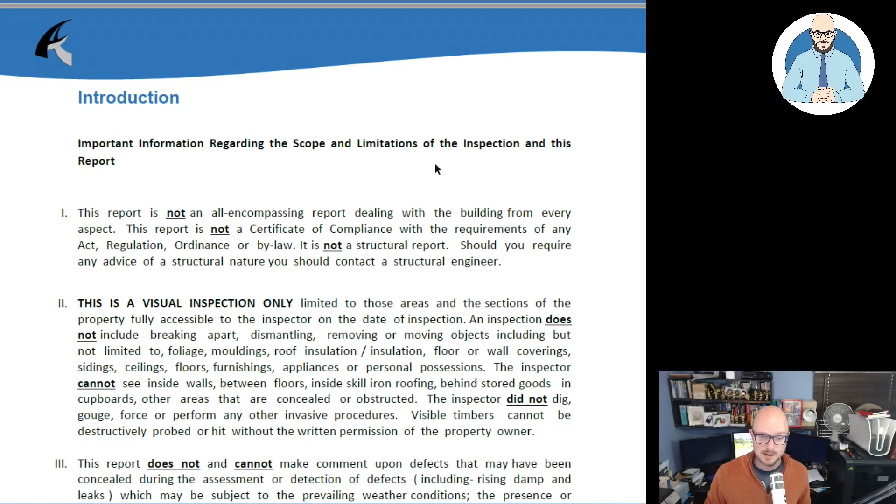Important information regarding the scope and limitations of the inspection and this report. Point 1: this report is not an all-encompassing report dealing with the building from every aspect. This report is not a certificate of compliance with the requirements of any act, regulation, ordinance, or bylaw. It is not a structural report. Should you require any advice of a structural nature, you should contact a structural engineer.

Now remember that we're getting everyone telling us, from the Building Designers Organization, the RIA, engineers, everyone saying that they're pushing for a solution for this, which would be yearly inspections. So I guess they'd push for yearly structural inspections, because these type of dilapidation inspections, you'll see what they can capture and what they can't capture without opening up the building and causing damage.

Point 2: this is a visual inspection only, limited to those areas and sections of the property fully accessible to the inspector on the date of inspection. Notice that, fully accessible, so they can just lock off bits and not let people get in there. An inspection does not include breaking apart, dismantling, removing, or moving objects, including but not limited to foliage, mouldings, roof insulation, floor or wall coverings, sidings, ceilings, floor, furnishings, appliances, or personal possessions. The inspector cannot see inside walls.

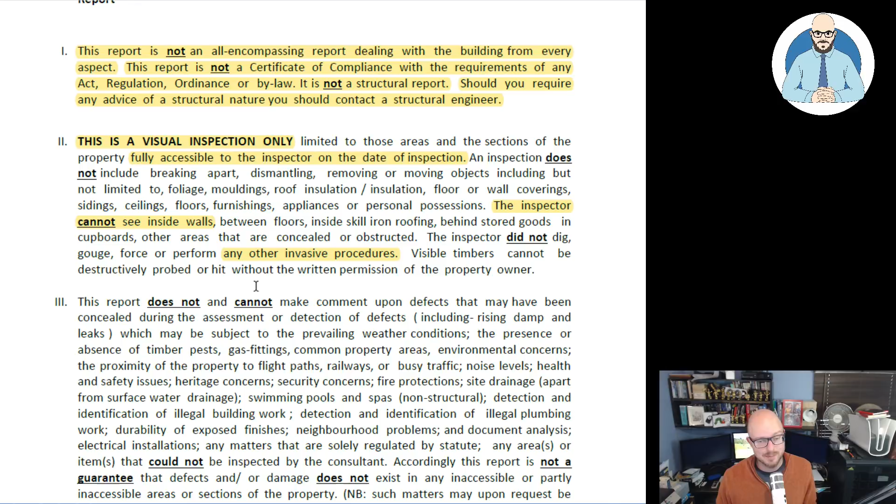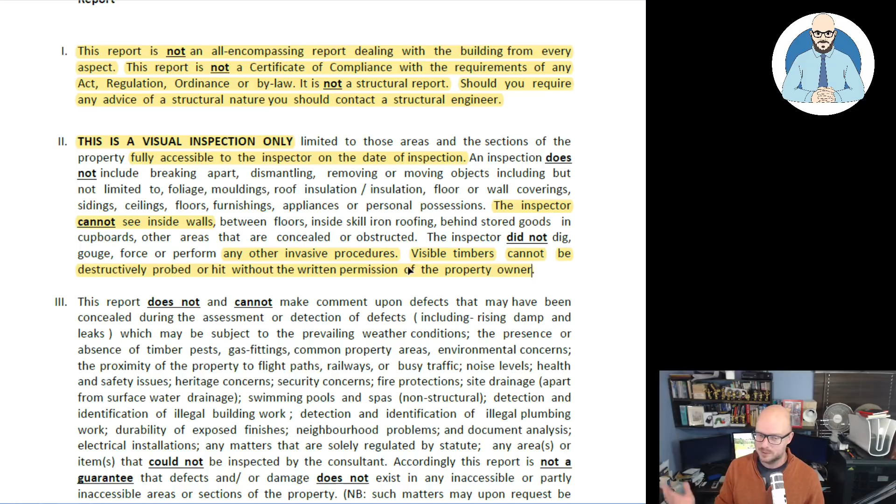Okay, you can do that, but then you have to pay for the rectification if you want. Visible timber cannot be destructively probed or hit without the written permission of the property owner. This is interesting because when we had a building pest inspection done on my mother's unit, he actually probed things without written permission and caused damage to the property. We were taking it all off and fixing it. Unfortunately, we'd already bought it, but I wasn't too impressed.

So this report does not and cannot make comments upon defects that may have been concealed during the assessment, or detection of defects including rising damp and leaks, which may be subject to prevailing weather conditions, the presence or absence of timber pests, gas fittings, common property areas, environmental concerns, proximity to flight paths, railway or busy traffic, noise levels, health and safety issues, heritage concerns, security concerns, fire protections, site drainage apart from surface water drainage, swimming pools and spas, non-structural items, and detection and identification of illegal building work. Yeah, that's another thing.

Detection and identification of illegal plumbing work. We noticed that on some jobs too, where you get a plumber out to inspect it and they go, yeah, this can't happen.

Durability of exposed finishes, neighborhood problems, document analysis, electrical installation, any matters solely regulated by statute, any areas or items that could not be inspected by the consultant. Accordingly, this report is not a guarantee that defects and or damage does not exist in any inaccessible or partly inaccessible areas or sections of the property.

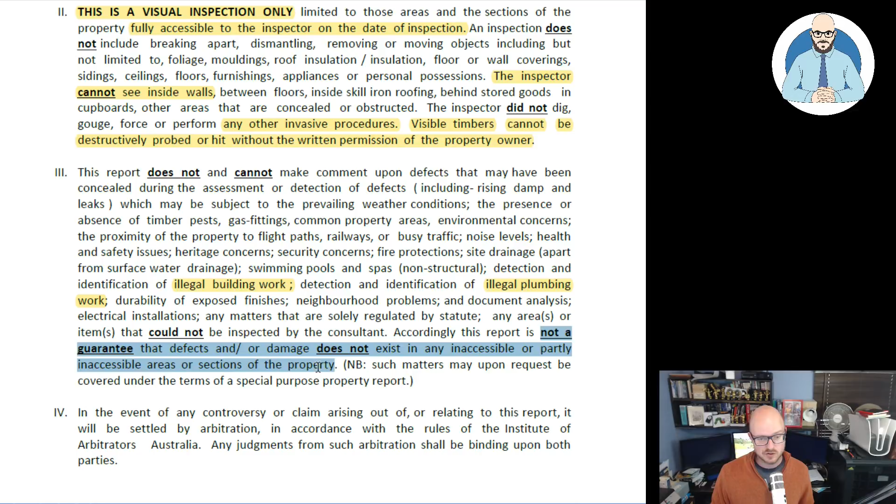I know this isn't the most exciting thing, but remember, people are calling for putting this financial burden on all the stratas or body corporates on a yearly basis as a way of addressing all these issues.

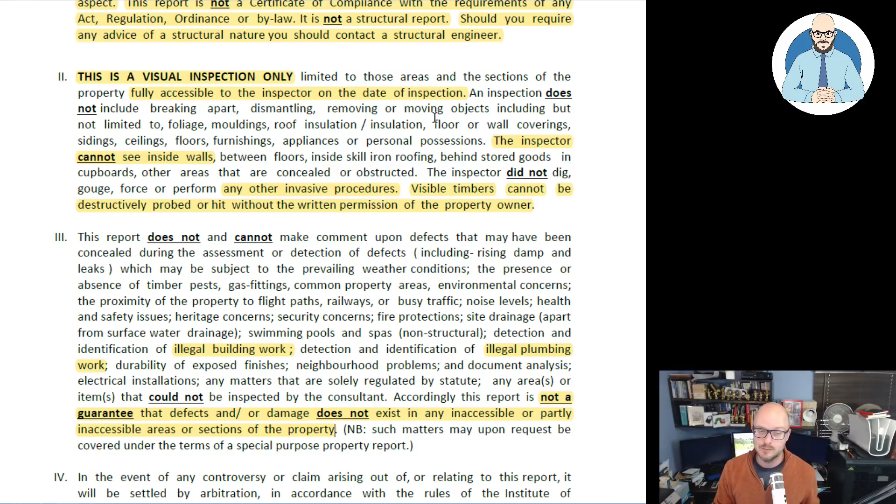But look at the limitations here, guys. It shows to me that even if you get a structural engineer out there, are they going to be x-raying the slabs to check for things? There's a lot of limitations with what you can check unless you want to be invasive, and that adds additional cost. And it's even worse if your invasive acts don't find any damage.

Such matters may upon request be covered under the terms of a special purpose property report. In the event of any controversy or claim arising out of or relating to this report, it will be settled by arbitration in accordance with the rules of the Institute of Arbitrators Australia. Any judgment from such arbitration shall be binding upon both parties. So they're protecting themselves there.

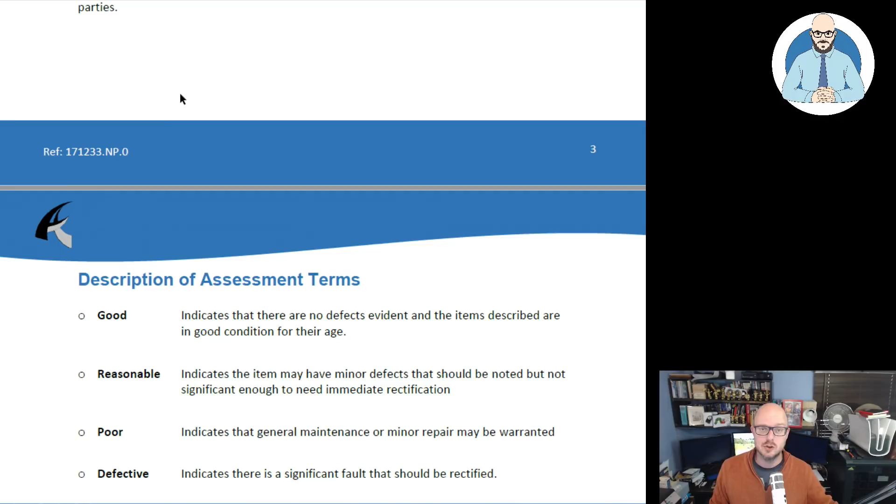I don't blame them in the slightest, because there's a lot of risk associated with this. I mean, how many YouTubers are reading these reports and talking about them?

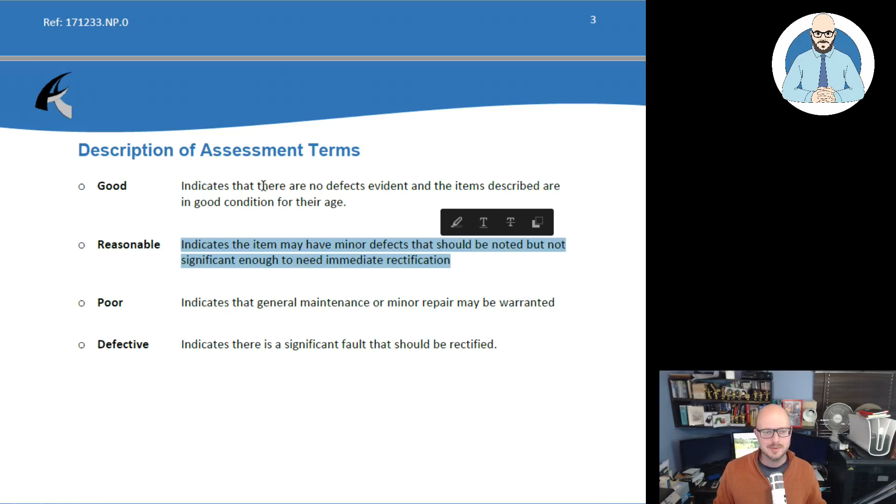Reasonable, that's our favourite Reserve Bank governor's word, isn't it, for our economy? It indicates that the item may have minor defects and should be noted but not significant enough to need immediate rectification. Well, actually, if we take these terms and apply them to our economy, it's definitely not good, and it's definitely not reasonable as much as he's saying, because they have taken immediate rectification, haven't they? Poor indicates that general maintenance or minor repair may be warranted.

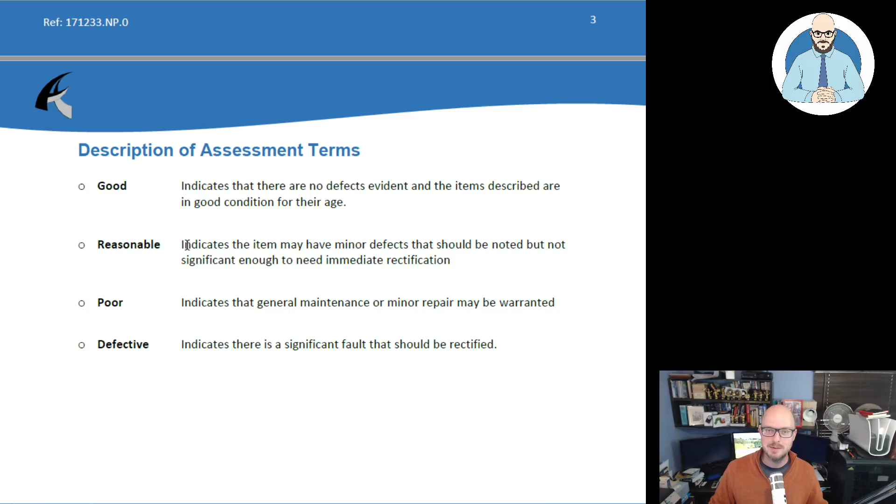What do you reckon? Do you think dropping the interest rate is poor? I know I'm going off topic, but it's funny. Maybe our economy is in a poor state by this assessment. Maybe we should get engineers running our economy. All the engineers, thumbs up if you like that idea.

Defective indicates there's a significant fault that should be rectified. Well, I think we'd all agree that that's an important thing.

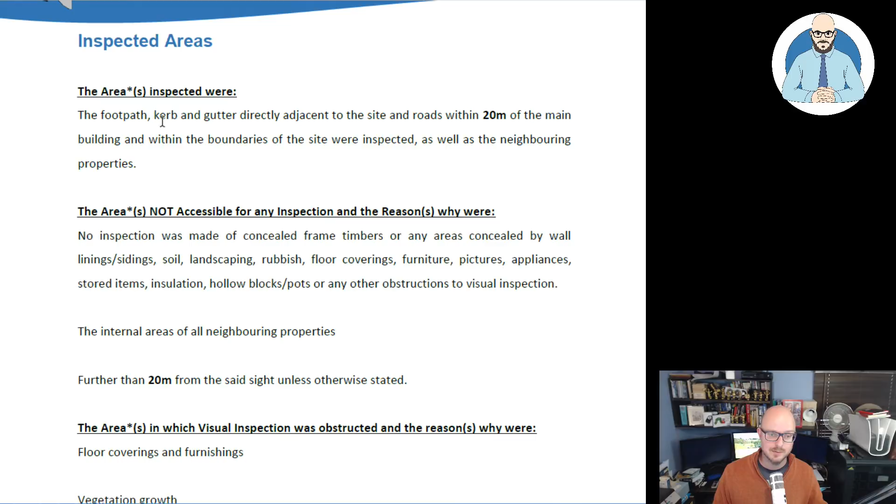So what do they do? The inspection areas that were inspected: the footpath, kerb, gutter directly adjacent to the site, within 20 metres of the main building, within the boundaries of the site were inspected, as well as neighbouring properties. The area is not accessible for any inspection, or any areas concealed by wall. Yep, we've talked about that.

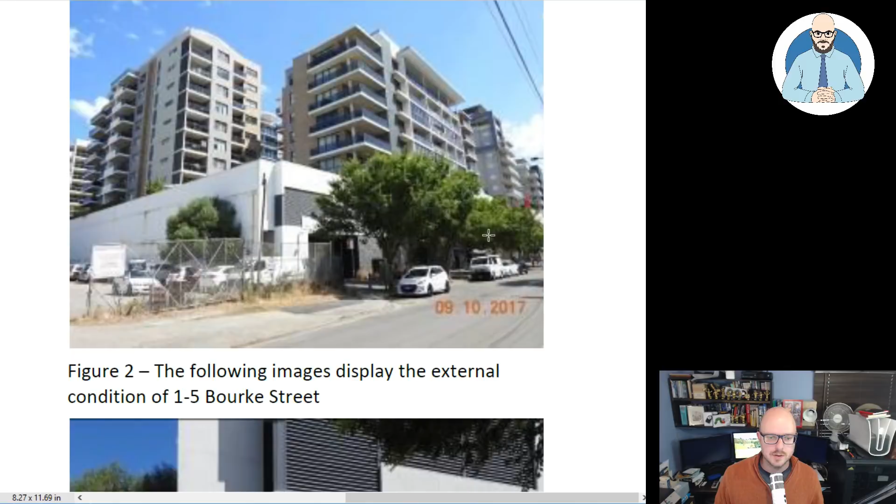So let's have a look. And here we go, this is the inspection. This is how they do it. You can see here, figure 2, the following images display the condition of 1-5. Here's an overall image, and they date stamp each photograph because this can be used in court proceedings, can't it? And this is the general condition of the northern facade.

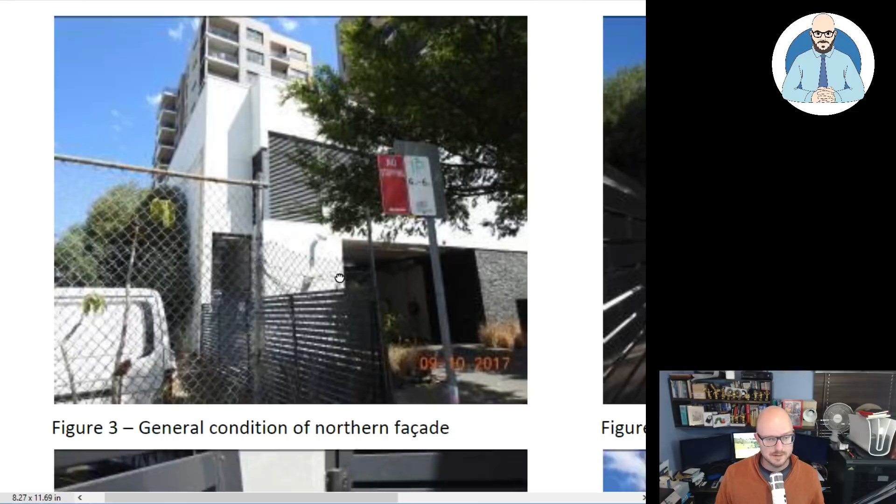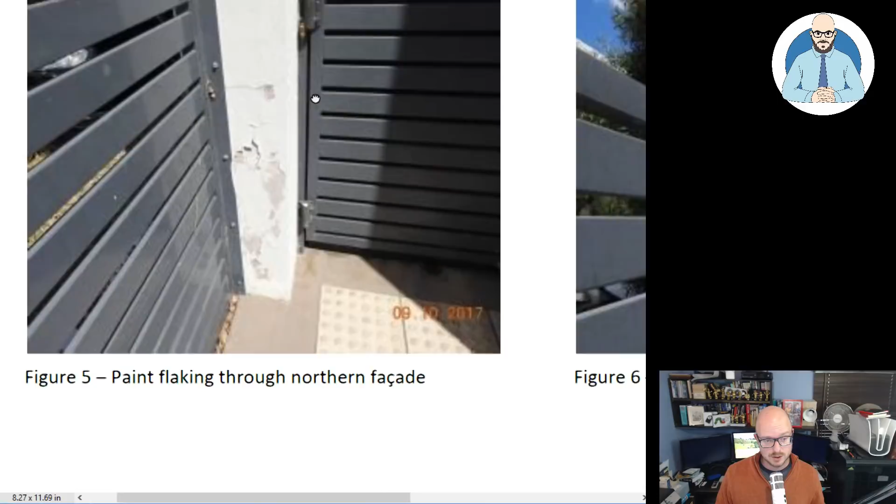I hope they have higher quality images than this. This will be a huge document, honestly. If they did it in Word, it may have dumbed it down. So you can see here there's some damage, the general condition, paint flaking through the northern facade. There's some damage here, cracking propagating through the northern facade.

Where is that? Is that there? Maybe? Yeah, these images aren't as clear as you'd hope, are they? So we've got, just fit that to window. Paint flaking through the northern facade. Some cracking here, cracking through the facade, cracking through the northern facade.

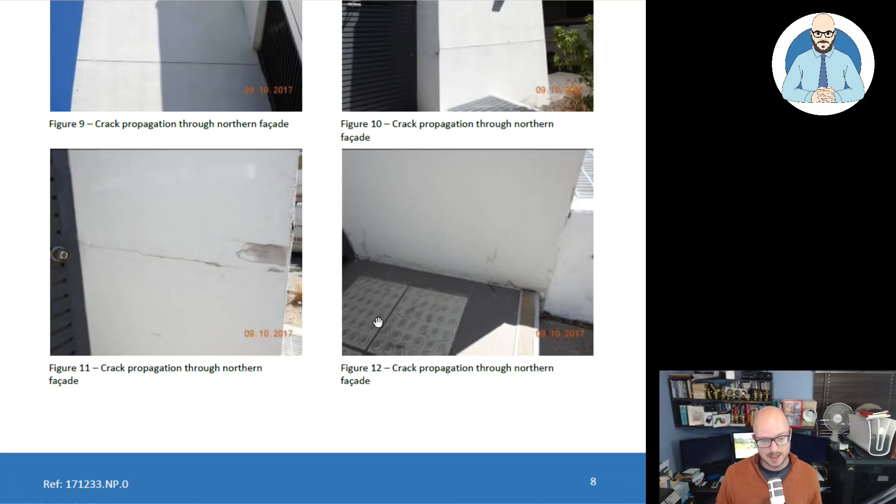Cracking, and look at that damage. Something's hit that there. Cracking propagation through the northern facade. Here, cracking. So they have to go through and capture as much as they can.

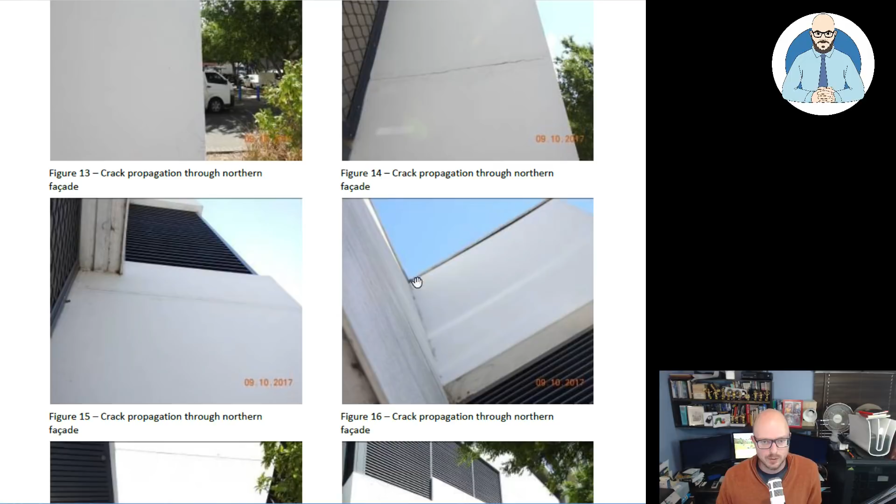To protect their client who's doing this work next door, because you don't want their work to be causing damage to this building. So remember, this should have been done before any work even started.

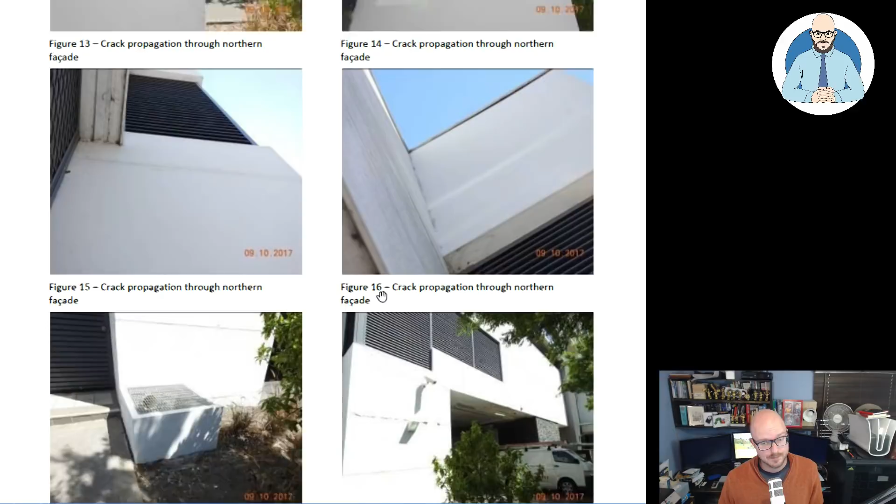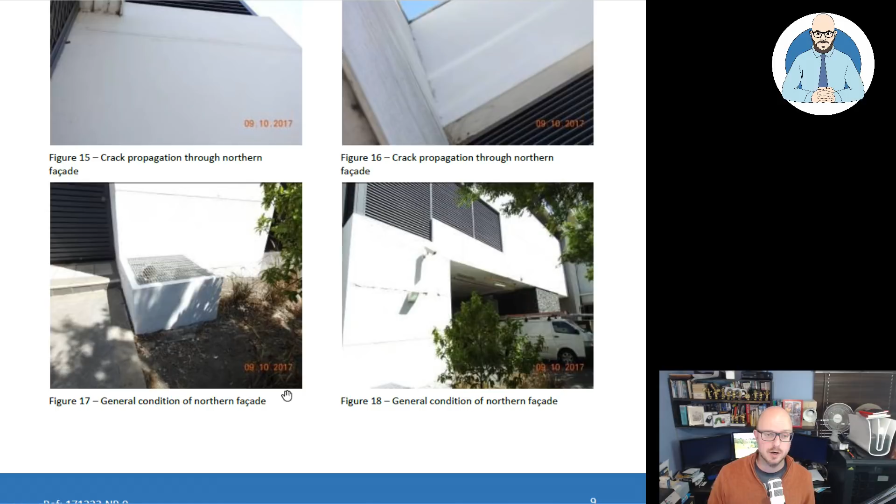2017. Got some cracking here. This kind of aligns with what we've seen in other places, where people were leaving comments on reviews of Mascot Towers that they had advised of cracking from 2011. 7 News reported on it as well, that people were informed of that.

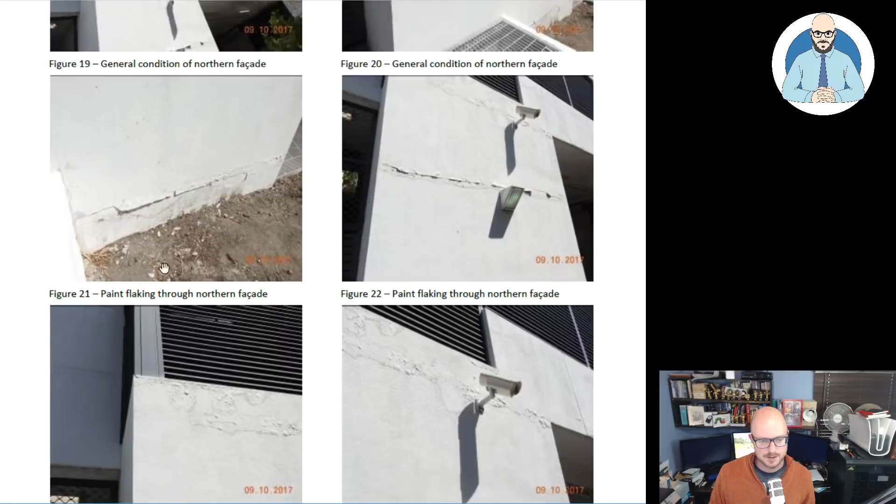Look, you've got cracking here, general condition. Look at that cracking. Is that the same one? It's the same photo, the same spot here. Paint flakes through the northern facade. So these are all signs of damage, of water getting into it, potentially expanding. So here we go, you've got paint flaking, you've got some damage there.

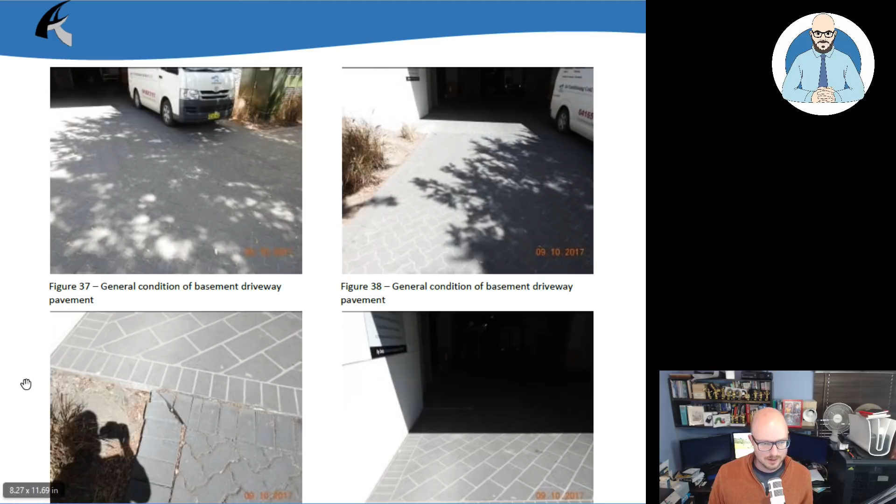But one image that I want you all to remember, and we'll get there. I mean, they're looking at the general conditions of the pavement and driveway. There'll be a lot of stuff here that's just for the record, little stuff like that. They've got to pick it all up, you've got to photograph all of it. So this is a full day's work. I don't know if he's wearing a hat - he should be, because it looks sunny there. It's a health and safety issue.

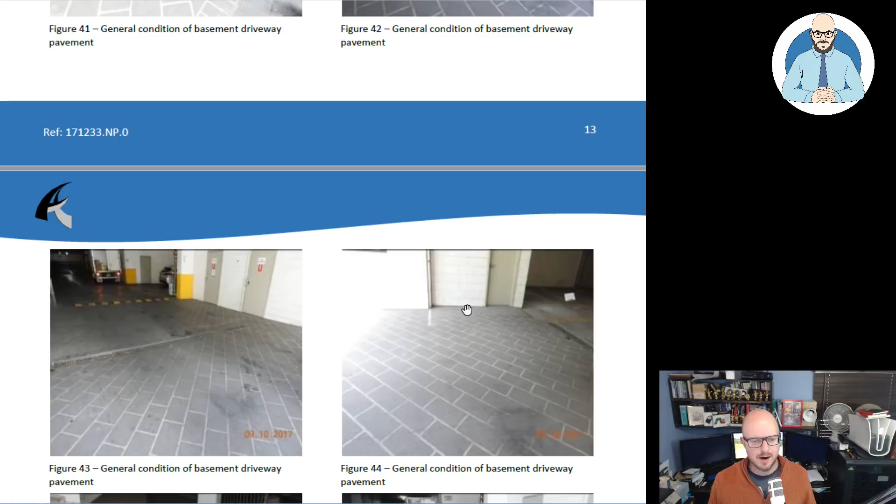You can see here, there's some cracking there. There's always going to be minor things like this, minor stuff, but they need to record it all. We've had jobs where, based on the photographs we took, we used that to get a builder to replace some damaged tiles that was damaged from their guys moving stuff around. That's what you do - you do it to protect your client.

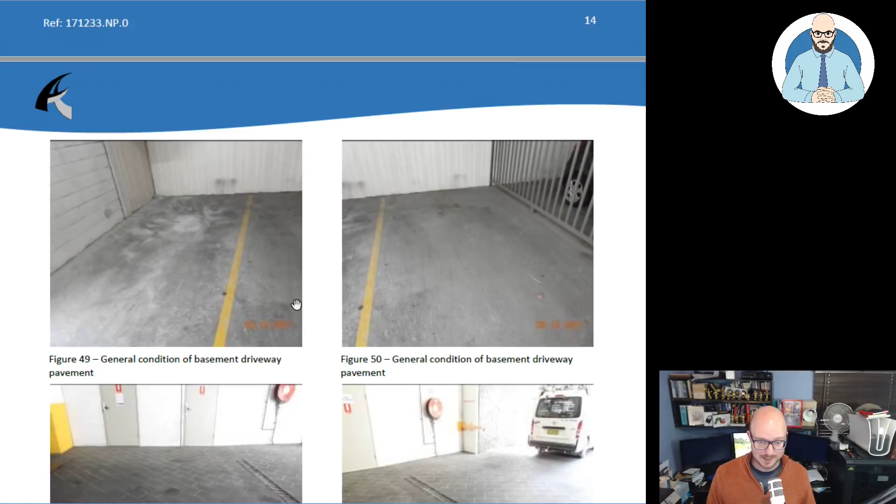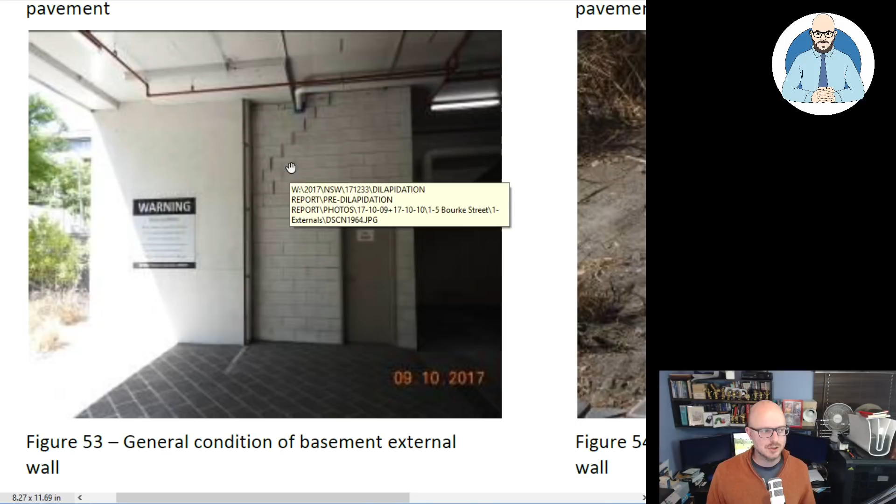Now, don't we recognize this? Don't we recognize this right here? Right here, general condition of the basement external wall, figure 53. That's in all of the newspapers and news articles, everything. That image, the cracking, that's what they're showing. The cracking - it's from 2017, it existed.

That's been there for years, since the 9th of the 10th, 2017. So they knew about it, they knew what was going on there. Paint flaking through the basement external walls.

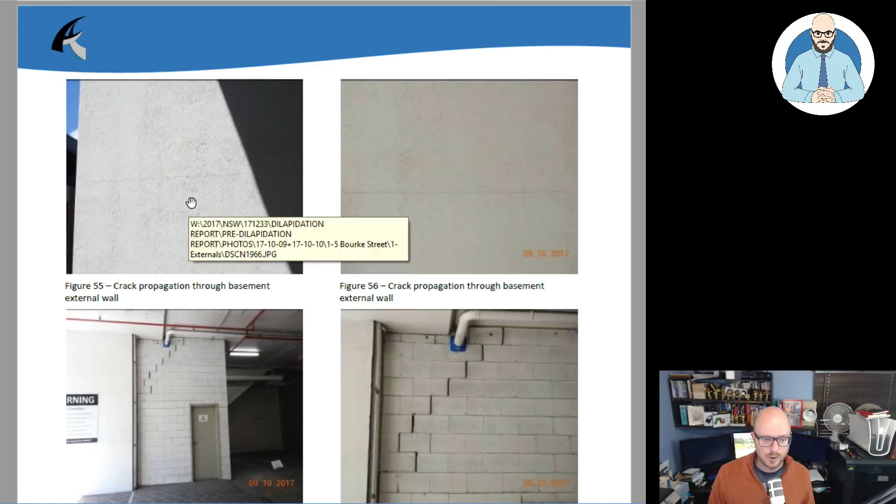So if you're doing - one lesson to take away here - you can see this is exactly what they've been using on the news. Cracking, propagating through basement external walls, image, figure 58. It's what they're using on the news to just talk about this.

If you're doing any construction work, anything, even a residential project, even an extension, you should get one of these reports done - a dilapidation report of your neighboring buildings. Even if you do it yourself, even if you ask your building designer to do it themselves. This is not a structural report, anyone can go and do this. I mean, you want an engineer to do it, or someone experienced in the construction industry, even a builder would be good. They're probably much better, to be honest, in some ways, because they know where to look for wear and tear.

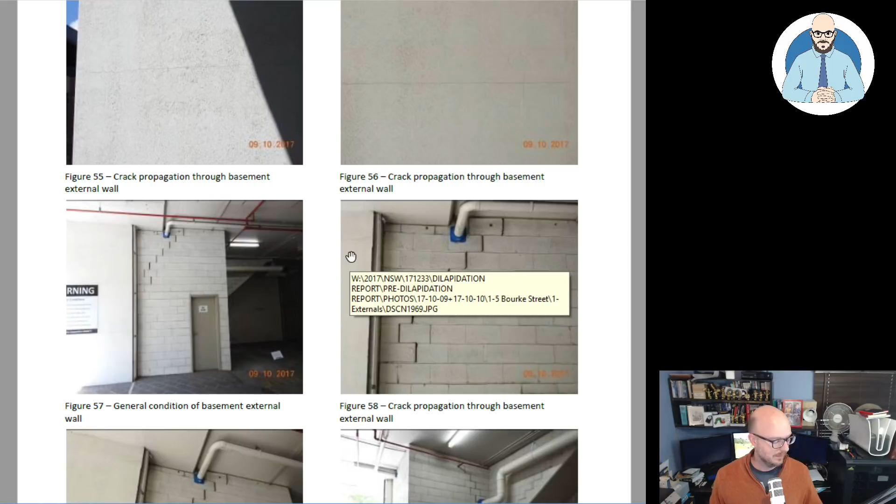But you want to record this. Just think about it - $500 to get someone to do this for you. This would have cost more. I'm talking domestic house, you know, for a day. It may save you a fortune. It may be something that you can use to protect yourself in a legal case.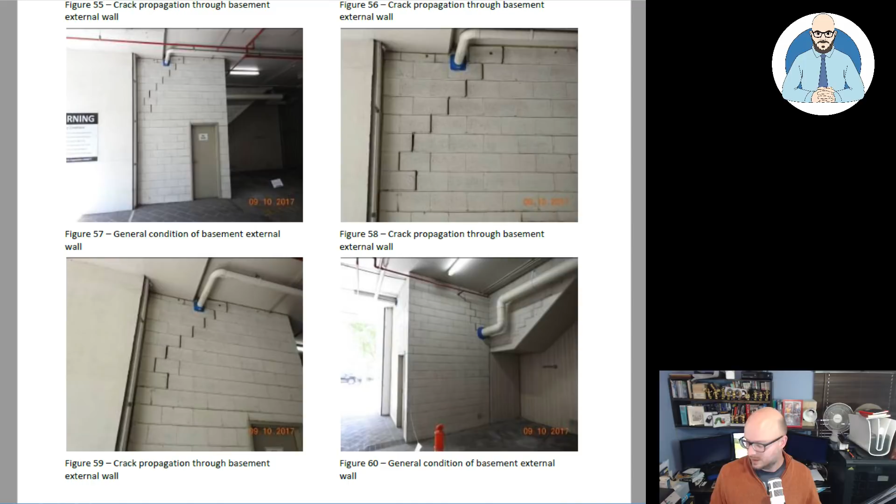Now, someone recently bought in here, so I wonder how their building and pest inspection, how it brought up all these issues, if they were identified. I'm getting people commenting on things - I need to turn that off.

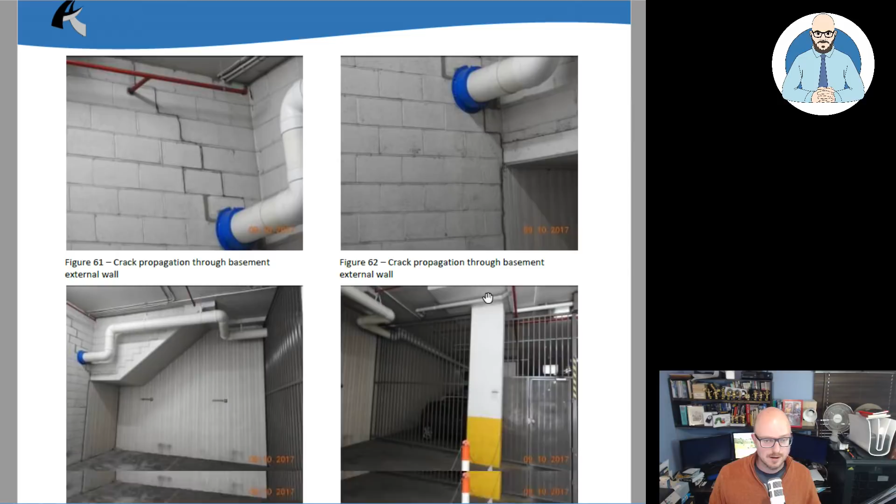Oh well, so crack propagating through the basement external walls. Here you go, 2017. There you go, look at this - more cracking. 2017 - they knew about it.

So this is why one of these documents is so important. Look at here, we've got cracking up here, you've got cracking here. General condition of basement, external walls.

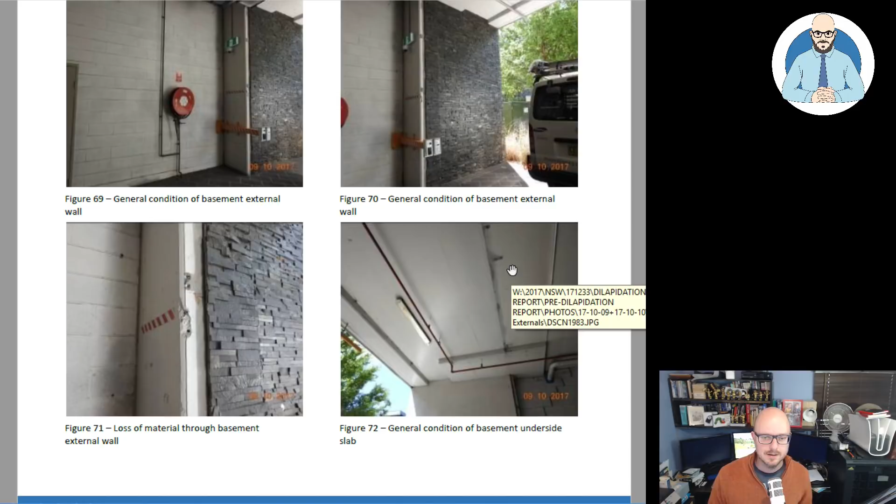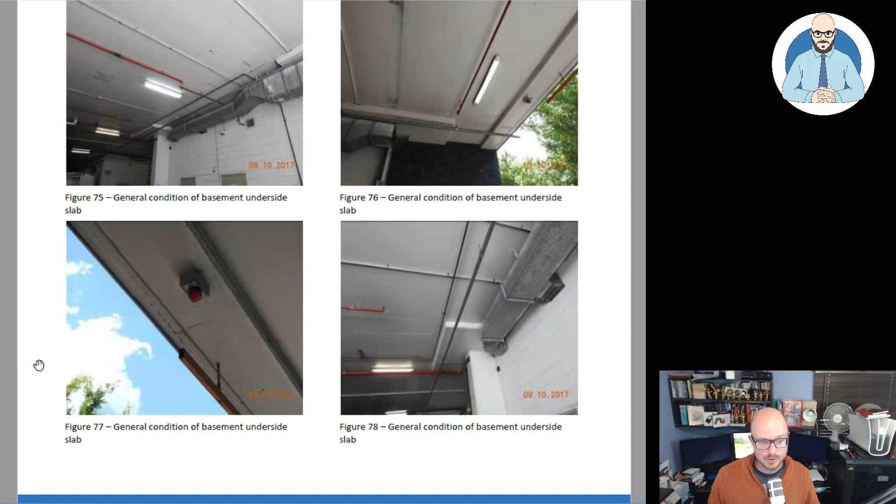So what does this tell us? If there was already cracking occurring in 2017, what does this tell us? Could there be latent conditions? Could there be changes? Could it have been the neighboring work? When did the work start next door? When did the work start? Hang on, I'll go back, let's see if we can.

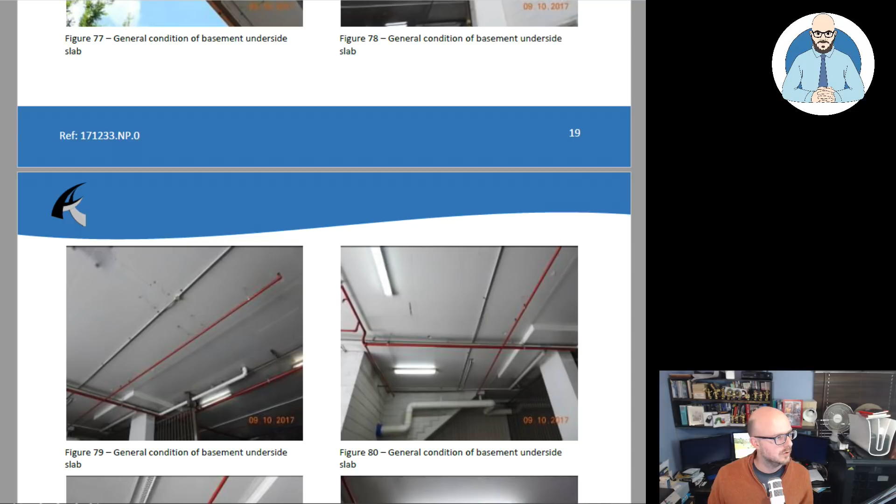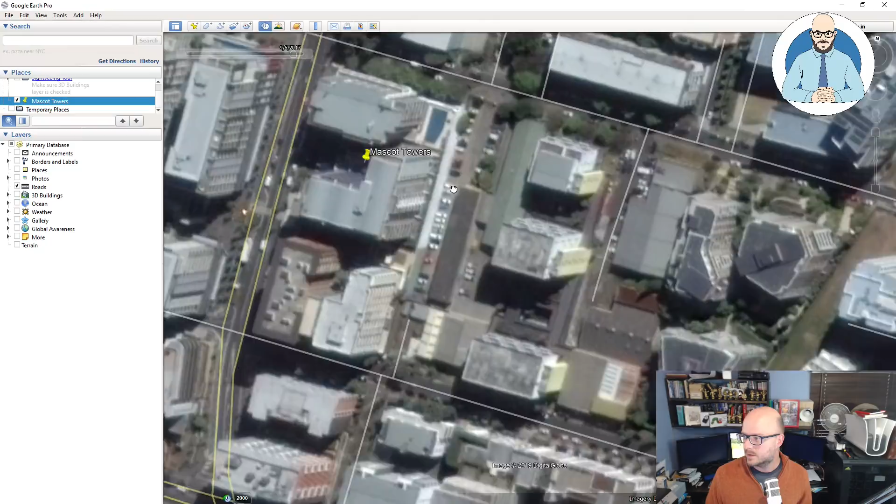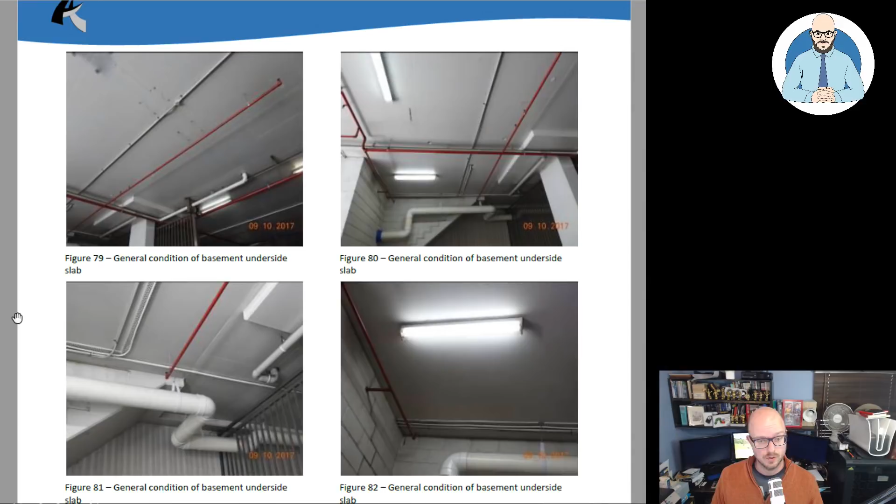So I just noticed down here in the bottom, where my picture is, there's an image date, and it says the 10th of 2017. So this is at the 10th of 2017, the time this report was done. So all of these cracks and things we're seeing occurred prior to any work happening on the site, when the site was just this empty car park.

Okay, $15 - is that a good rate for Sydney, guys? That's all day, isn't it? Bloody hell, you don't want to park in the middle of Brisbane. It's just insane, you know.

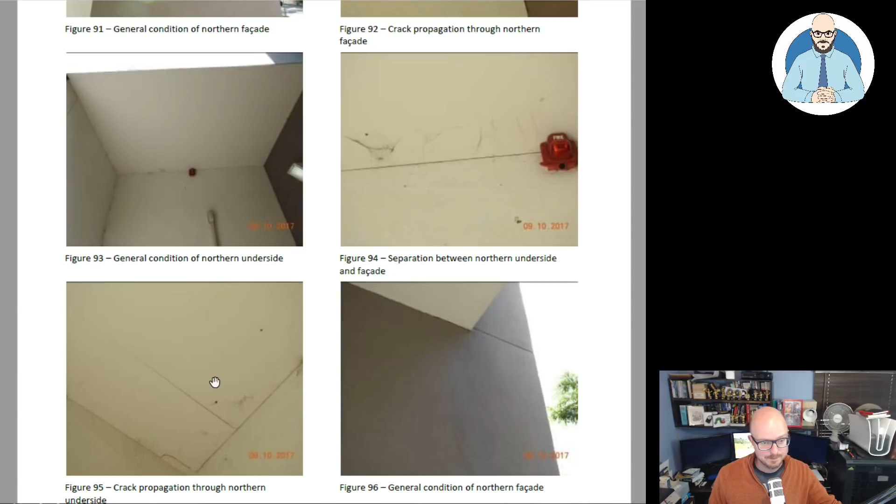Anyway, let's have a look at some more defects. General condition of the north facade. You know, they take these overall photos and then boom, cracking. Separation between north underside facade. General condition - so they're looking at it. I mean, look here, cracking progressing everywhere.

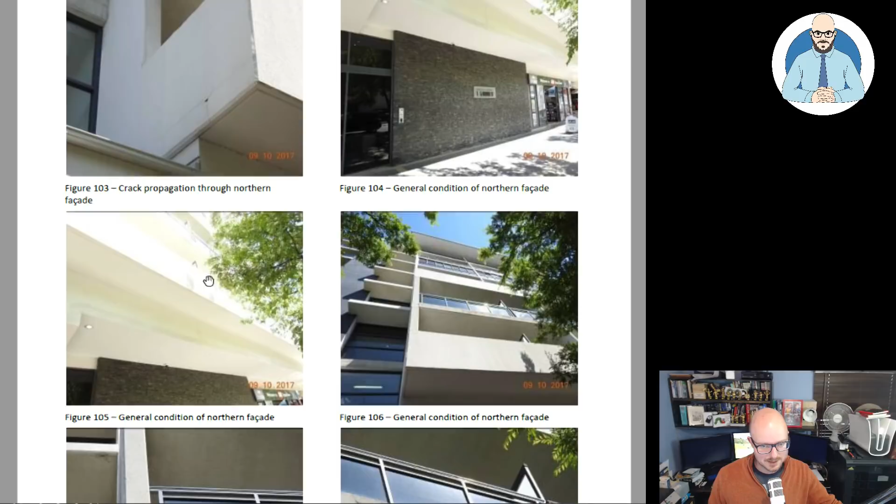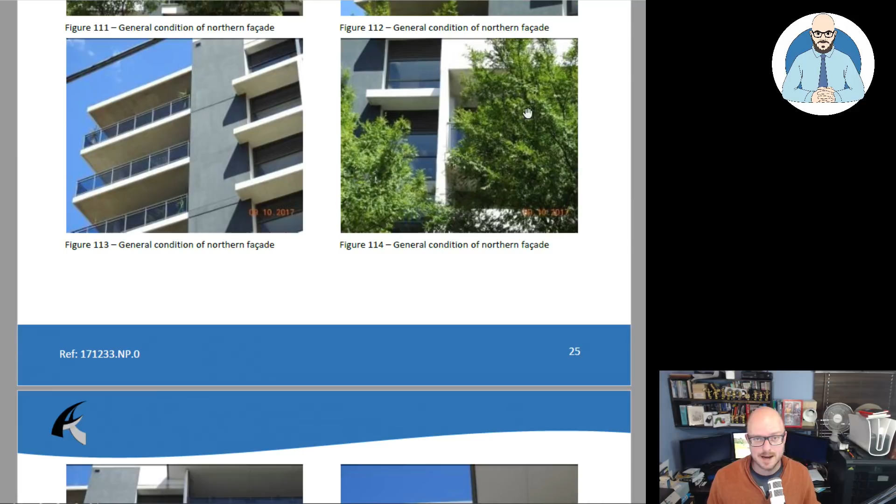This thing was cracking to pieces. Cracking here, general condition of the northern façade. So yeah, there's cracking there, cracking everywhere. Look at that, the balcony. Oh boy, do they have enough cover on the rebar? What's going on? Is the water getting into places? What's happening? Is there differential settlement occurring prior to any work happening in the adjoining building?

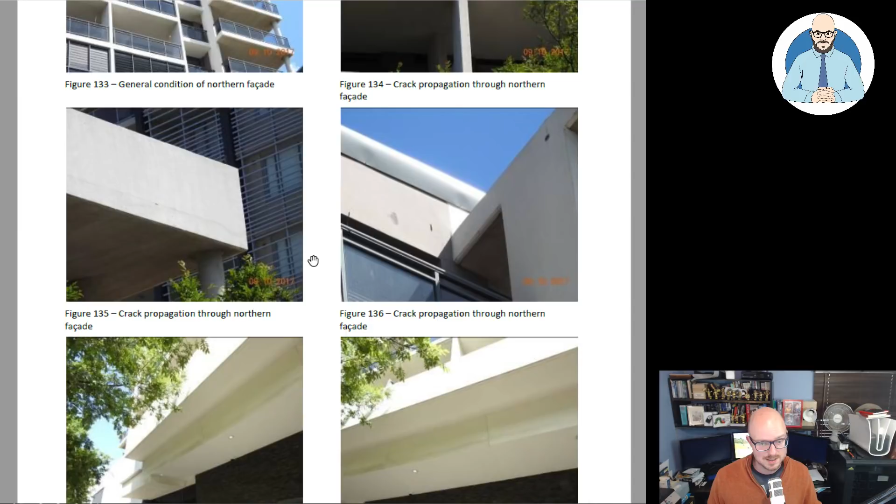Okay, so let's have a look. I mean, some of these are just minor, but some of them are not minor. They're not minor. And these are all things to keep an eye out for when you're looking at a property, particularly if you get all excited and you're getting emotionally invested - you may miss this stuff. Some of these are hard to see. And they're doing general condition to the facade, overall to see.

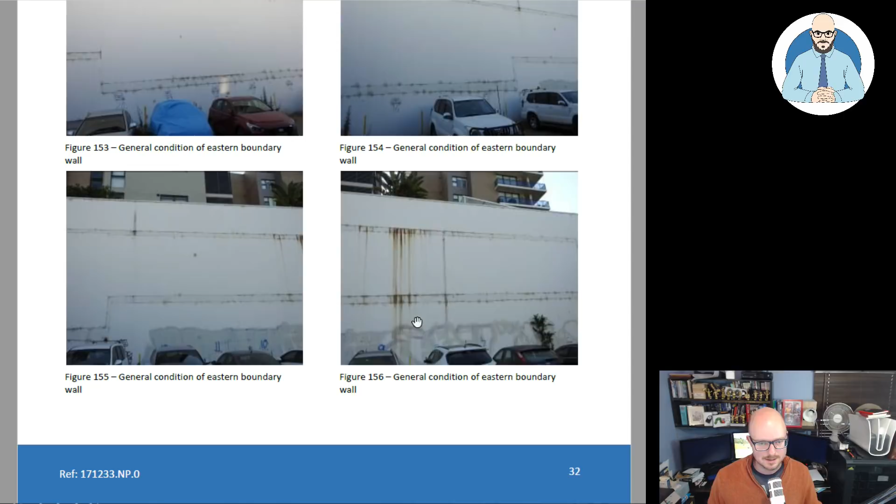Because, you know, if you smashed like a whole balustrade out - you can see the eastern boundary wall. I mean, here you go, let's have a look. Is it any - oh, look at all that leaking out through there. That's disgusting. Waterproofing for that garden's working well, isn't it? So it's getting into there.

I tell you, whenever you put plants on buildings, and it's all the bloody rage, everyone wants to put green plants all over buildings - they're a nightmare. They are an utter nightmare to waterproof. I've spoken to some people that would even get the pool guys in to try and waterproof the planter boxes and just had nothing but issues with it. But councils want you to cover the buildings in it.

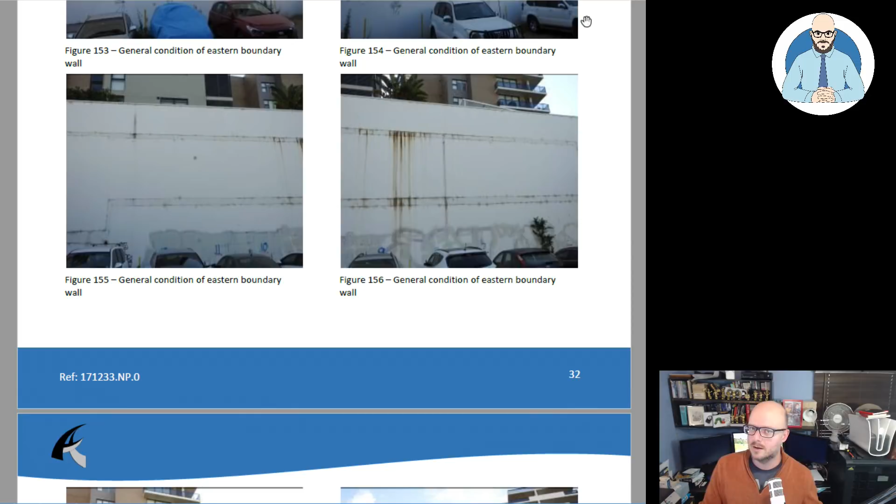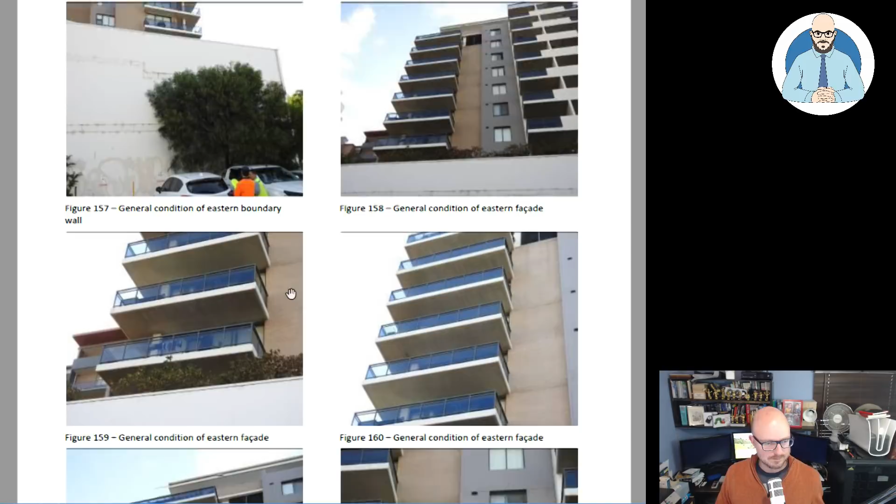And I remember we were working for a client and all the plants had been pulled out because the roots just destroyed the concrete and cost a fortune in damage. But, you know, they don't care about that. They don't care about that. So here's some more general condition photos.

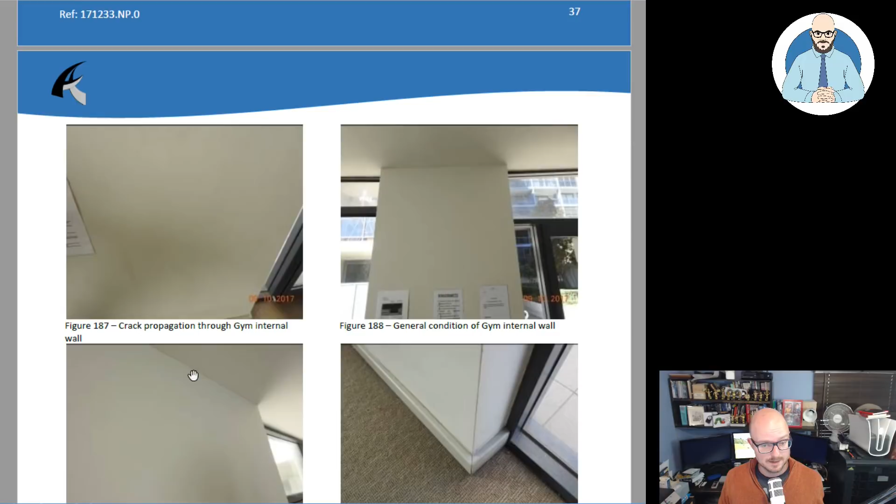And now they're going inside to look at the gymnasium, guys. I'll see if we see anything really exciting. Cracking propagation - so you can see here just a faint line, a little crack through the wall. So, you know, they're cracking.

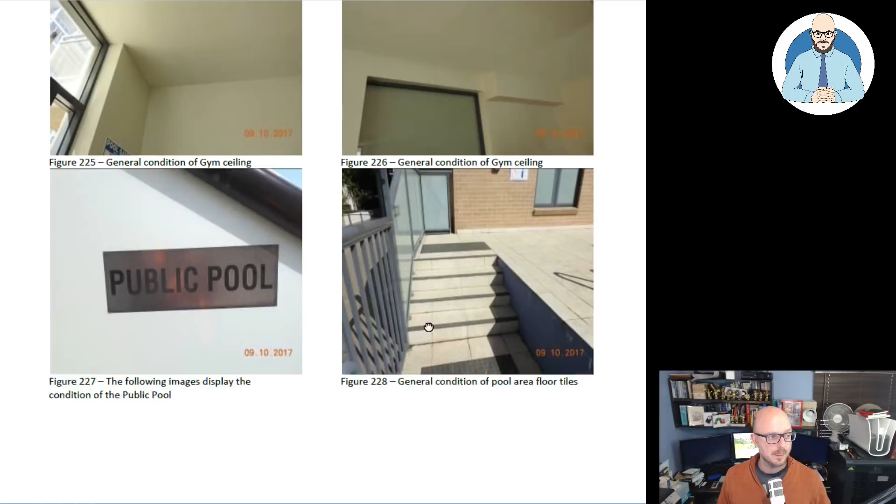So you can argue, why did they accept the money from the builder? I know people are telling me it's standard practice, but that doesn't mean it's good. That doesn't mean it's good. What are they looking at, the pool? You know, cracking in the pool area.

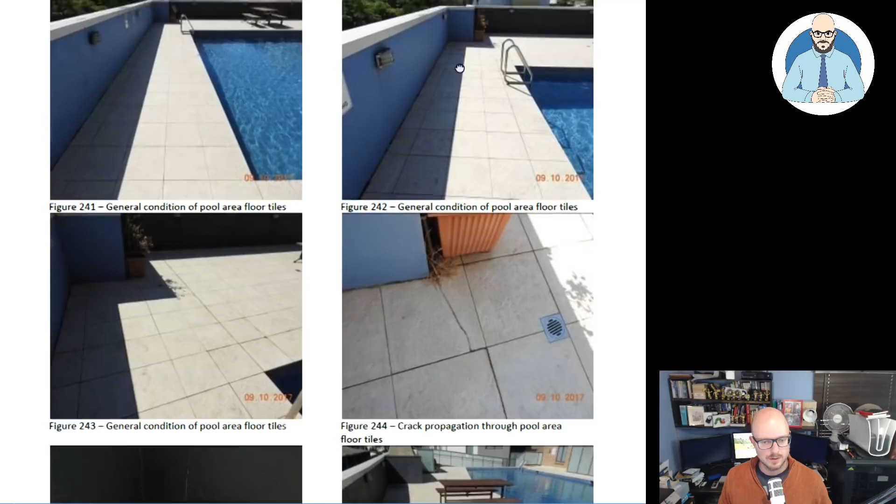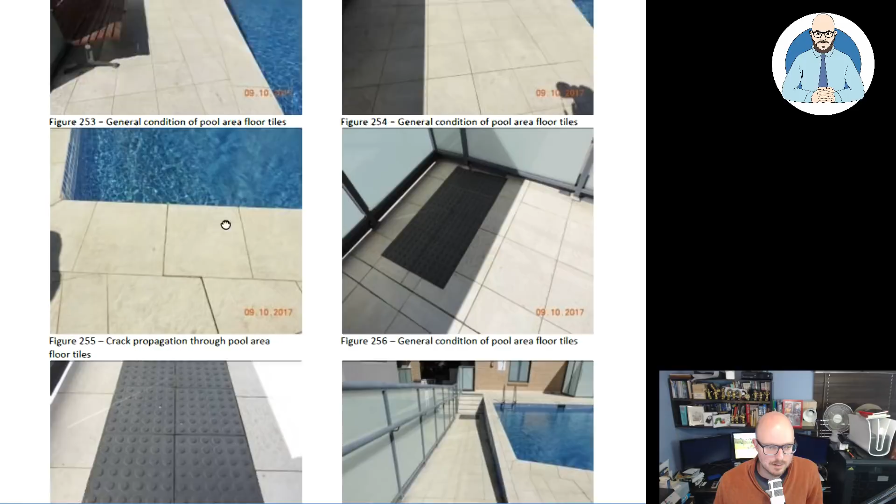It's not too bad in the pool, although maybe I'm not noticing it in the photos. Tile cracking. That's the thing, you've got to look at expansion joints in your tile floors. And there's Australian standards that you need to comply with. Cracking, that's not too bad. These things always look horrible, but then you can put the little individual ones on and they cost like a fortune.

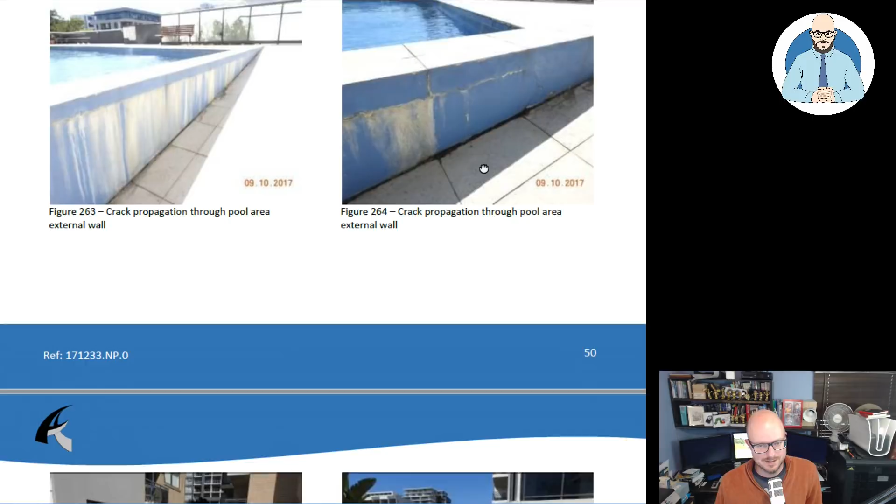The tactile indicators, they look good though. Yuck. Gross, oh boy. Yeah, that's the problem whenever you put a capping block on there.

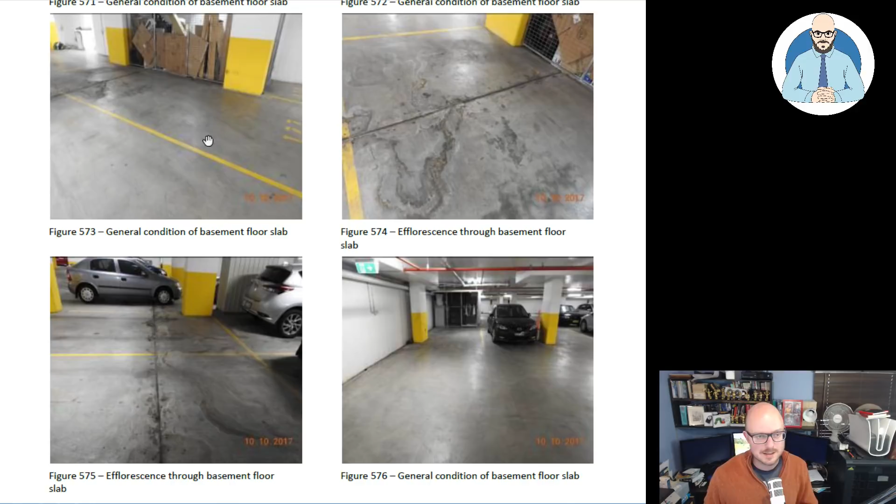Let's have a look - so yeah, guys, it'll be more of the same. And this goes on for 1,300 pages. Here, let's have a look at some more we can see from the basement. And, you know, I've linked to the source of these documents if you'd like to go through it yourself. Let's see if we can find any more.

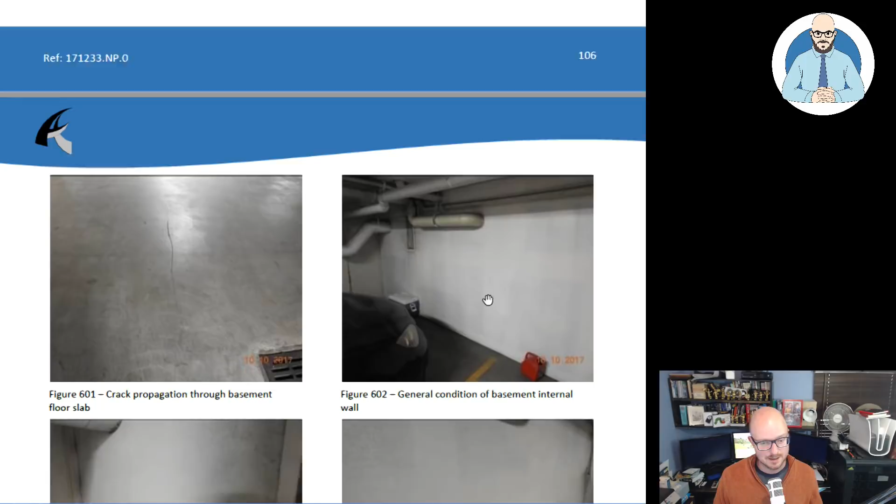I mean, they have to photograph every little thing. They have to go through there and get as much as they can. So, you know, there's a crack propagating through the basement. There's cracks in the walls, cracks in the basement. General condition, more general condition. Is that a crack going up? No, that's an expansion, isn't it?

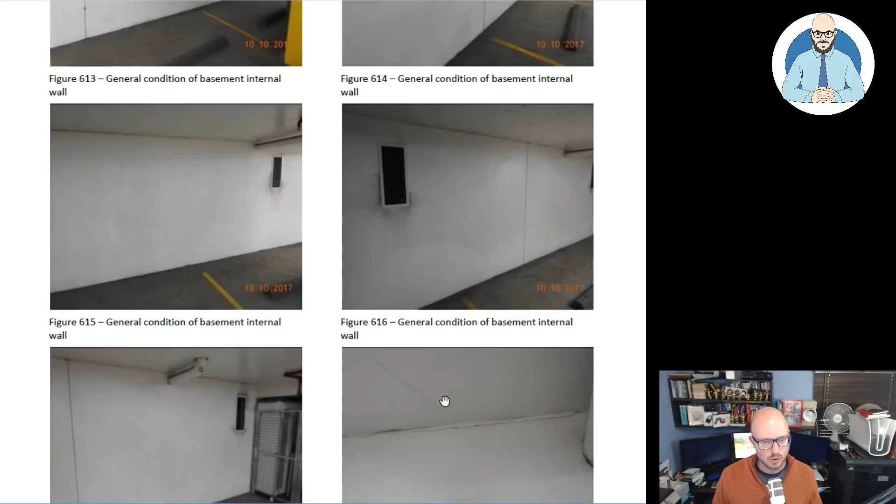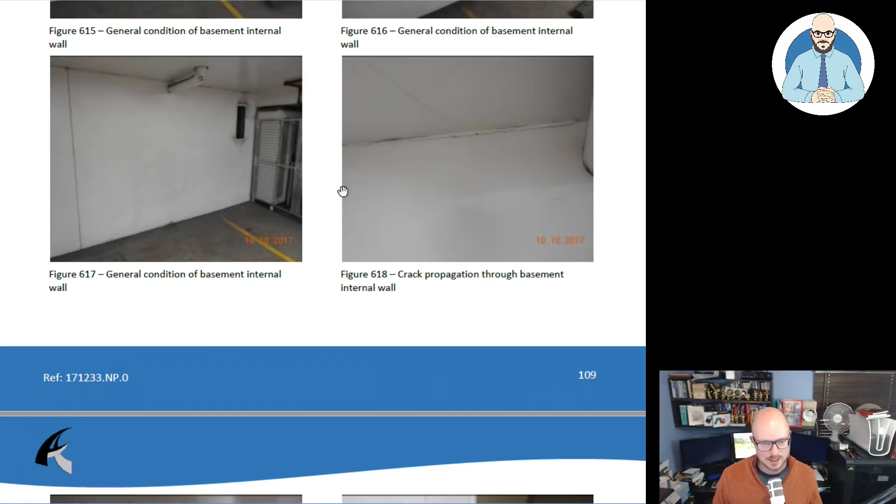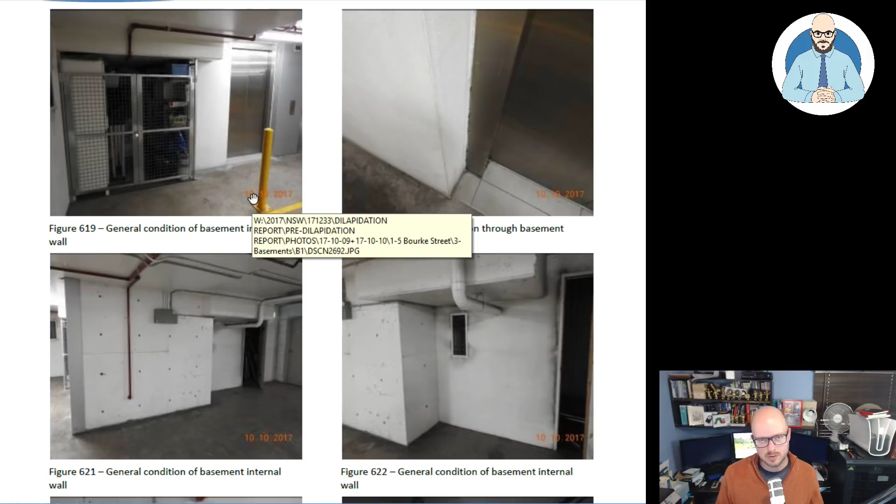Yeah, that's a joint designed for cracking - crack propagation through the basement. Buildings are going to have cracks in them, that happens, and usually design expansion joints, or you cut into the concrete to kind of guide the cracks in certain places, even little ones. But there are sizes that you don't want.

What's happening there? That's terrible. Terribly dusty and gross. They don't keep it very clean, do they? More cracking - general condition of the basement internal walls.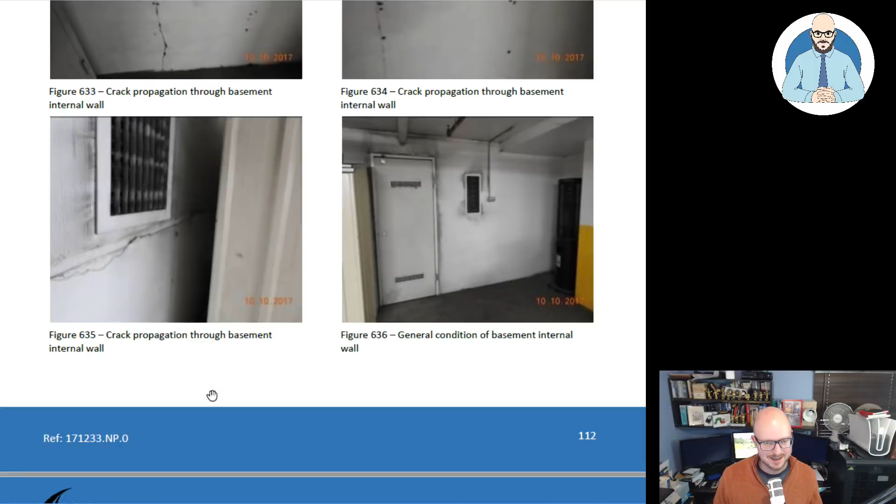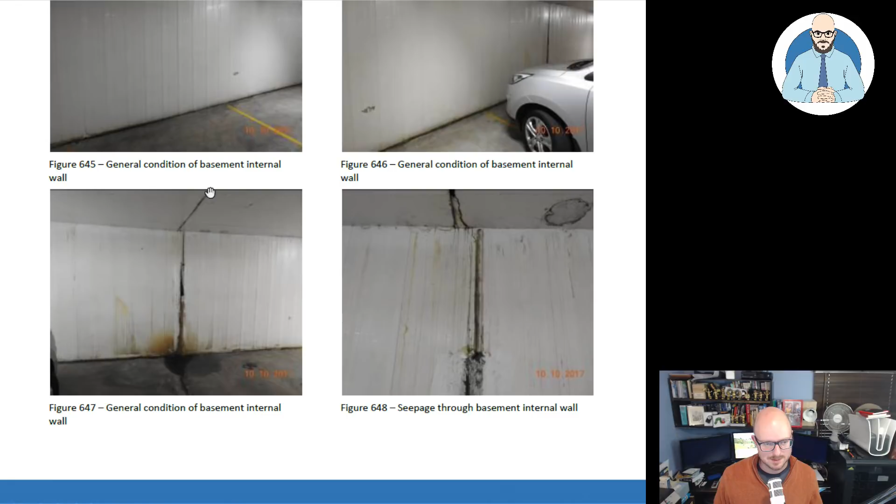Anything big like that, they're the ones to look out for, particularly when they're bigger than a hairline. If you can get something in there, that's seepage through the basement internal wall. That's bad, that's a waterproofing issue, and you don't want that to get into your reinforcing because that can cause serious issues - seepage through the basement walls.

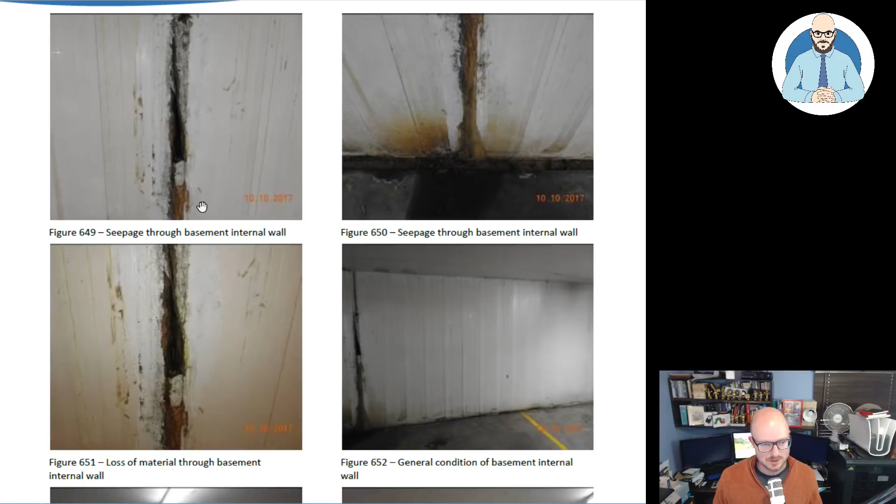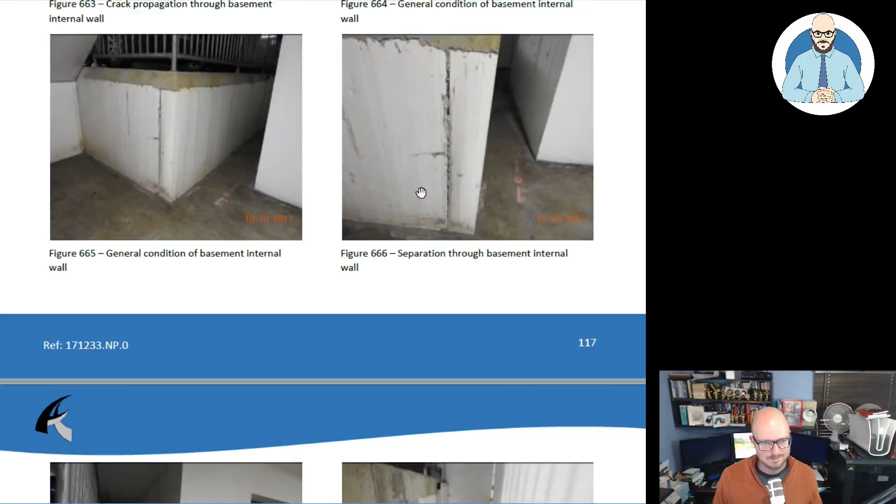General condition - yeah, it's the basement, it never looks pretty. But if you want to look at a building and the quality of it, you go down to the basement, you see how good the concrete is. You look at the cracking, the patchwork, the separation here - we've got gaps, cracking through here.

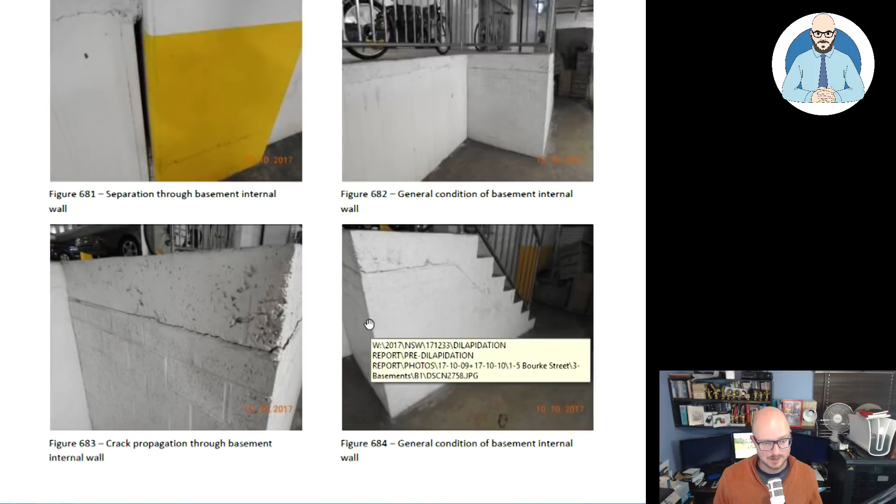So they've been pretty thorough. Pretty thorough.

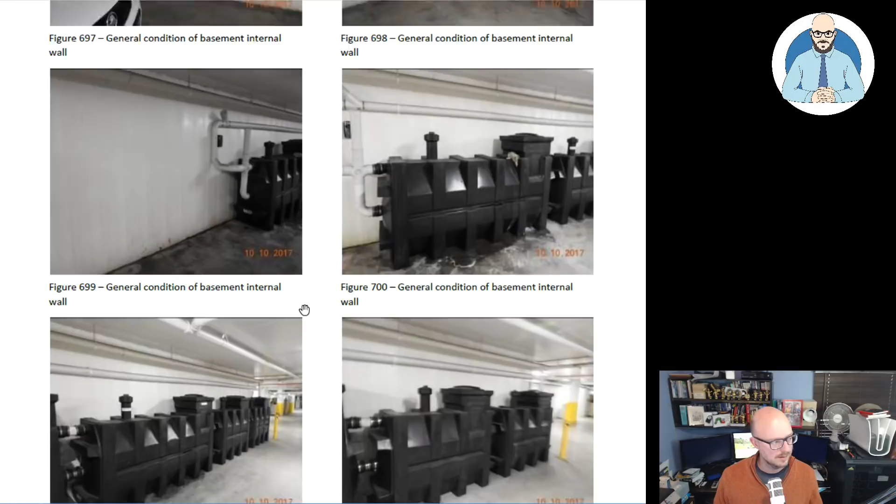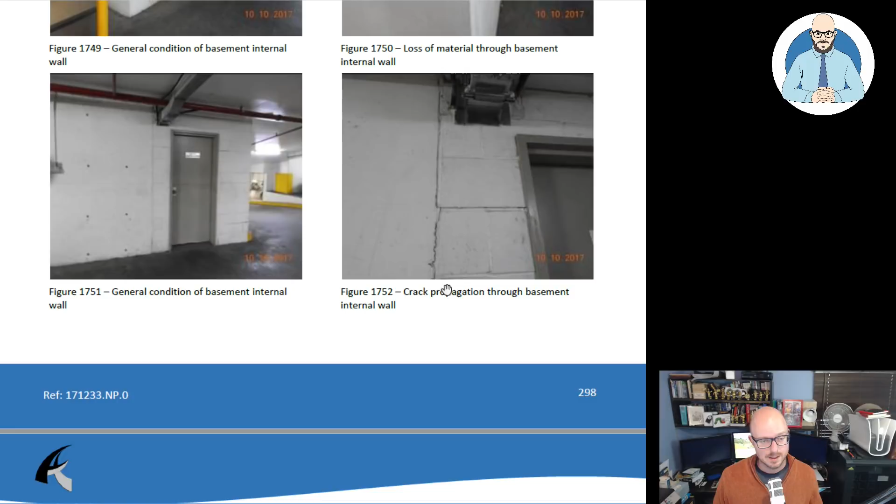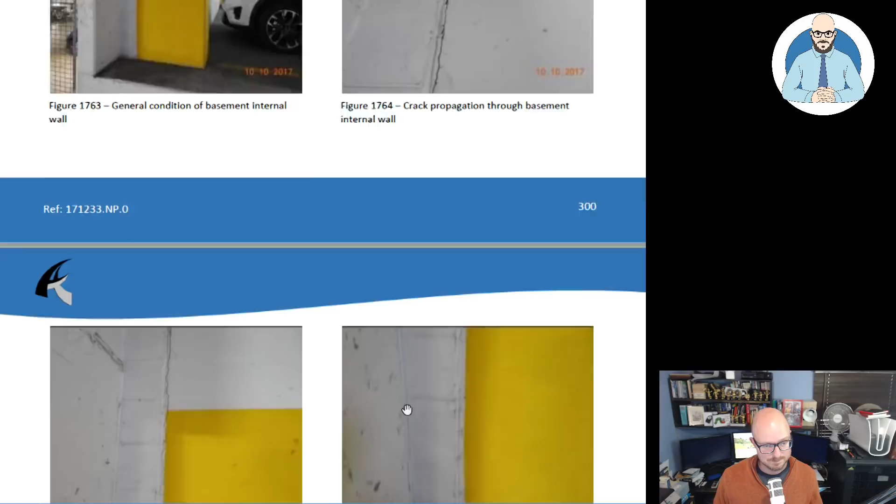So guys, I'm not going to go through the entire thing. I think I'll do part 2 and we'll go through the next document. But you can see from this, I'd argue that they were aware of a lot of issues with the building - there was some cracking issues everywhere through it. And remember, this is all done before when that neighboring lot was an empty car park.

An empty car park. I mean, evidence of patchwork - there you go, evidence of patchwork. There's where they're trying to patch it and repair it.

And we've seen this on jobs too, where buildings were bought by - where we last had our tenancy, it was bought by a big retail organization, and it was a local shopping center. They just came in - the previous owners, managed by an accounting firm, came in and just hid all of the concrete cancer with sheet white metal. That was it - just screwed it in there, covered it, hid it, because they were doing existing conditions reports like this, and just because it was covered, they couldn't see it. But then they bought a building riddled with concrete cancer, and they paid millions for it.

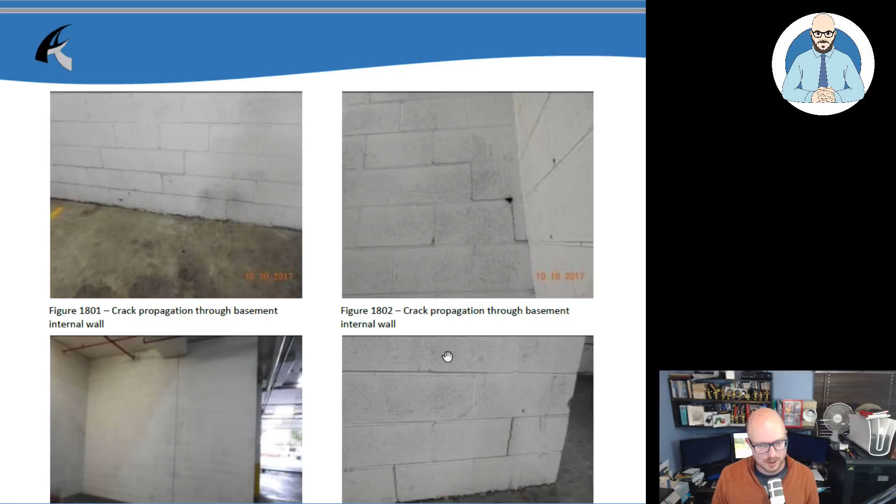Can I do 2 pages? No, I can't. What else comes out of this? Let's keep going through, we'll see if there's anything that jumps out. More cracking there.

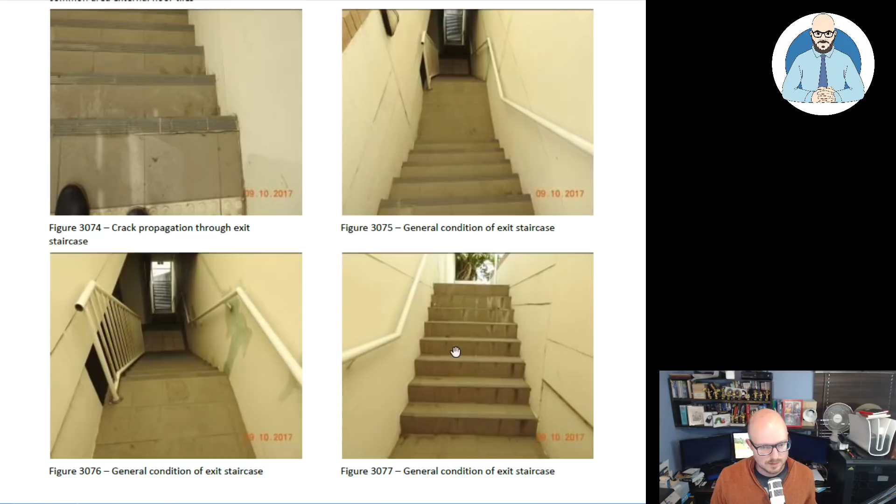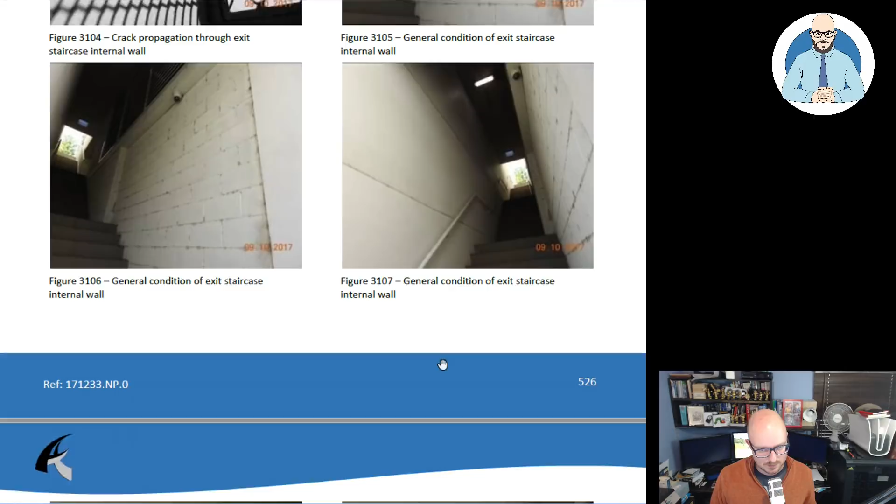So, it's looking pretty tight, isn't it, for a 10-year-old building. And the neighboring building - how are they going to sell any apartments? It's going to be a nightmare. It will be crazy.

Oh, let's hope there's nothing wrong with the gas, or the waste rooms.

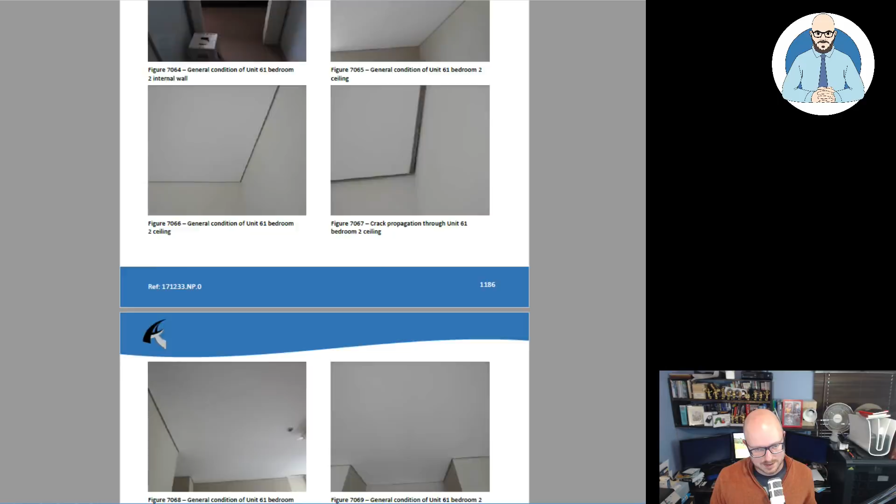So yes, then they go through the apartments, and I'll let you all spend your time going through this yourself. But I think it serves its purpose for us to have an appreciation that a lot of this cracking, particularly the stuff they're showing in the media, was in existence - there were issues prior to the work happening next door. Maybe the work next door exacerbated it. Some people have theory crafted that maybe they removed too much groundwater and it caused issues to the neighboring building. Perhaps - I'll keep an eye on all of this and be interested to see what comes out of the reports. But it's valuable looking at these type of documents, particularly if you never have, and then keeping this in mind when you hear people calling for inspections every year by structural engineers, or these type of inspections, and just think about what it'll catch and what it can't catch. And remember that when you are looking at buying something.